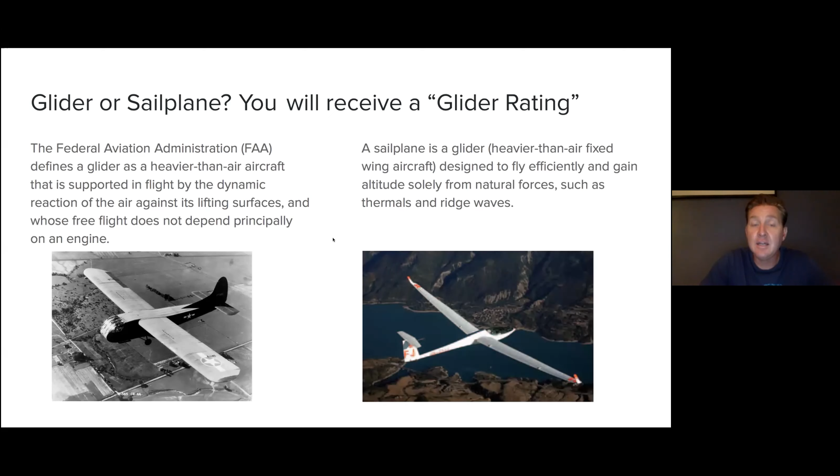Throughout this series, you're going to hear an interchangeable term, glider or sailplane. Those really are interchangeable - what you'll receive is a glider rating. But the FAA defines a glider as a heavier than air aircraft that's supported in flight by the dynamic reactions of air against its lifting surfaces, and whose flight does not depend principally on an engine. If you've been out to Boulder, you may have seen some self-launch sailplanes, and some have sustainer engines, but those are just used in place of a tow plane, and technically they're still gliders. The strict term sailplane is really an efficient aircraft designed to fly and gain altitude solely from natural forces such as thermals and ridge waves. So you'll hear those terms interchangeably.

As you go through looking at the schools, the FAA offers two different training paths. A Part 141 training school is typically reserved for professional pilot training. It provides more structured training with a standardized FAA approved training syllabus. All of the training done in Boulder, though, is done under Part 61, which gives a little more latitude to the components of that training. You're not required to complete a formal ground school - instead you could attend a course, do a home study course, or your CFI can sign you off for the ground portion.

And Armand, I actually looked for a 141 based glider school and couldn't find anyone in the country. Do you know of a 141 glider school? Negative, no. I don't think it exists. It's pretty specialized.

Some of the basic requirements - to be able to fly solo, you need to be 14 years of age and have the aeronautical knowledge on a test developed by your instructor. For a private rating, 16 years of age, complete the training and flight time requirements described under FAR Part 61. FAR Part 61 is a very important part for you to look up in your training to understand the requirements for your specific type of rating. And then you still have to pass the knowledge test and a practical test. If you're doing a commercial add-on or glider instructor glider rating, then 18 years of age, and again the knowledge test and another practical test in that case.

Jeff, are you showing a slide? Are you sharing a slideshow? Yeah, you're not seeing it? Correct, not seeing it. Are you seeing it now? No sir. Let's go back to... the green button on the bottom ought to give you the screen sharing. Yeah, okay, I see the problem here. Okay, I think there we go, working now, good. So you see glider design? Yes. Okay good, please proceed. Sorry about that, I had it beautiful on my screen, but it wasn't going to you guys.

Progressed on to a steel and fabric type of composition. These became popular - the Schweizer 1-26 in 1954 kind of really touched off the use of these materials in gliders, and then progressed on to metal wings with steel tubing and fabric fuselages, to where we had all-aluminum type of aircraft. Again, the 1-26 was one of those.

As composites became more available and easier to work with, they became the mainstay of glider construction, or at least as it advanced. Another thing that helped this was computer-aided design as this went on, and this really touched off the transition from what you might call a glider to a sailplane.

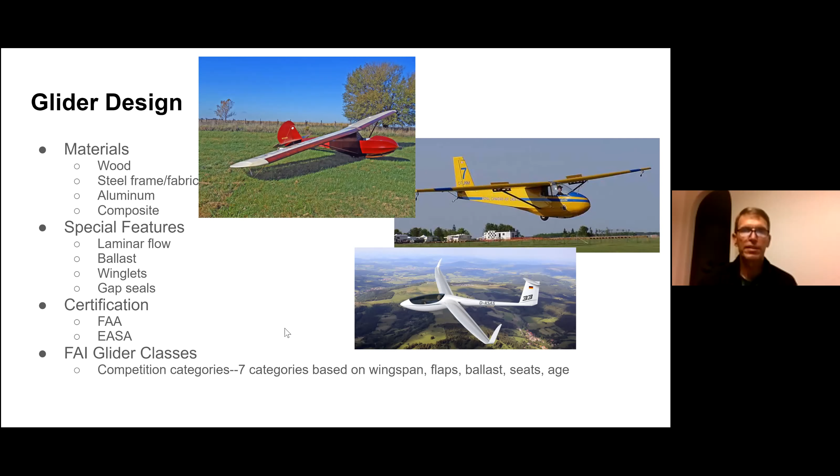Okay, moving on. Let's talk about the basic airframe components of a glider. We have the fuselage, which is the main area where the cockpit is and the wheels are mounted. Then we have the wings, which are attached to that. And we have the empennage, also known as the tail.

On the wings we have ailerons, used for roll control. We have air brakes, which are not unique to gliders, but pretty much every glider is going to have them - they control our glide path, a very important part of the aircraft. We have the horizontal tail, with the elevator attached, which controls our pitch. And we have the vertical tail or stabilizer, and a rudder, which controls our yaw or lateral control.

All gliders are going to have at least 2 wheels - your main wheel and your tail wheel. They may also have tip wheels or skids. Some gliders, particularly training gliders, are going to have a nose wheel in this area.

Another feature unique to gliders is the tow hook capability. You can either have a nose release, right on the nose or just aft of that, or a CG, center of gravity, release. Those are very important because they deal with how you're getting towed up into the air, and which one you'll be hooking into.

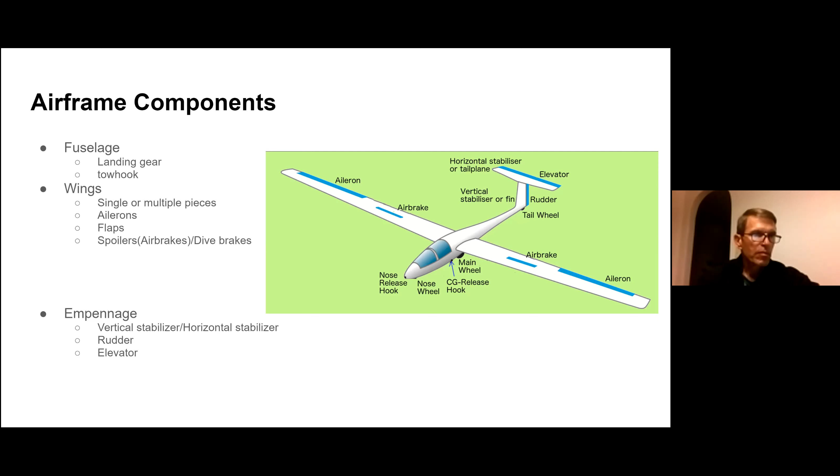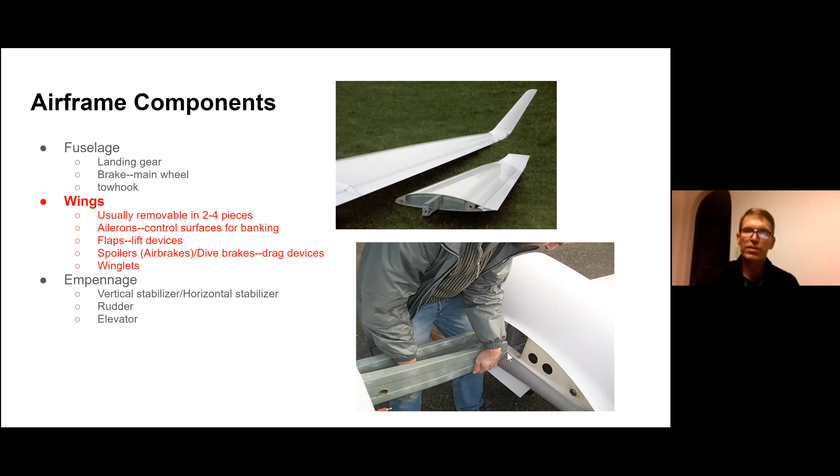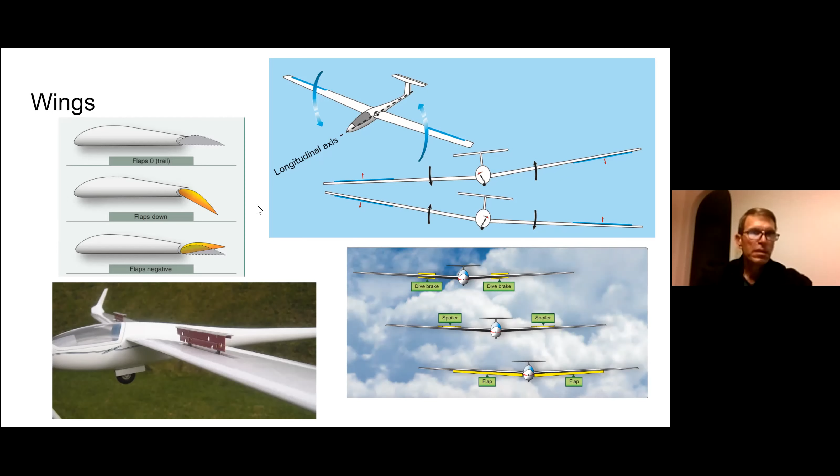For our empennage or tail, as I mentioned, we've got a vertical and horizontal stabilizer. Those are fixed surfaces. The rudder controls your yaw, or left and right movement of the nose. Your elevator on the tail controls your up and down movement, and that's called pitch.

For empennage variations, you've probably seen on powered aircraft various configurations of the tail. You can actually have one where there's no horizontal tail, and I'll show you a picture of that shortly.

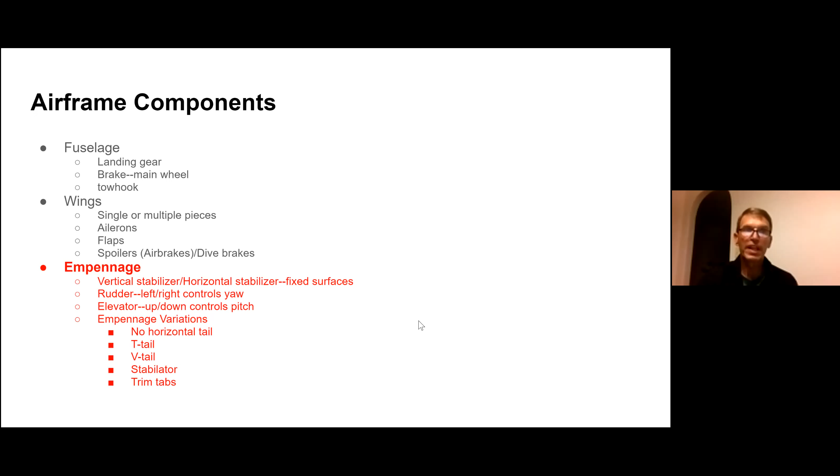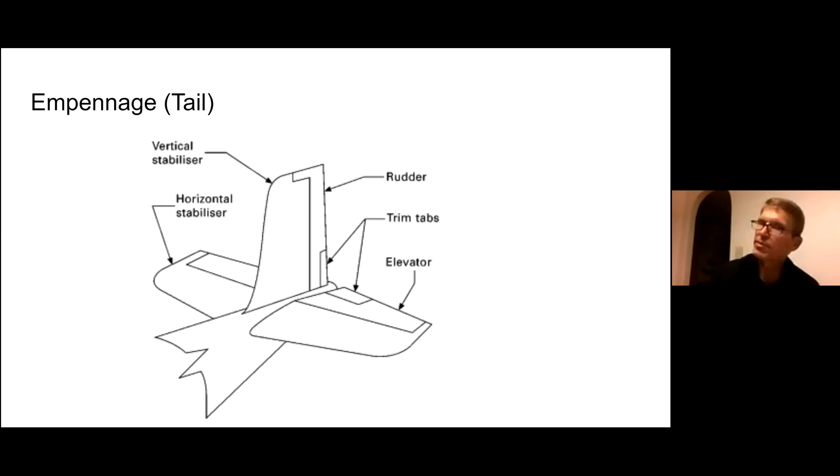I have yet to see trim tabs on a glider. I think the forces are typically not so high. Maybe Armand, you have experience with trim tabs on gliders? No, trim tabs seem to be unique to airplanes. On gliders I haven't seen it, usually we just have some kind of friction device that holds it in place, right on the stick itself.

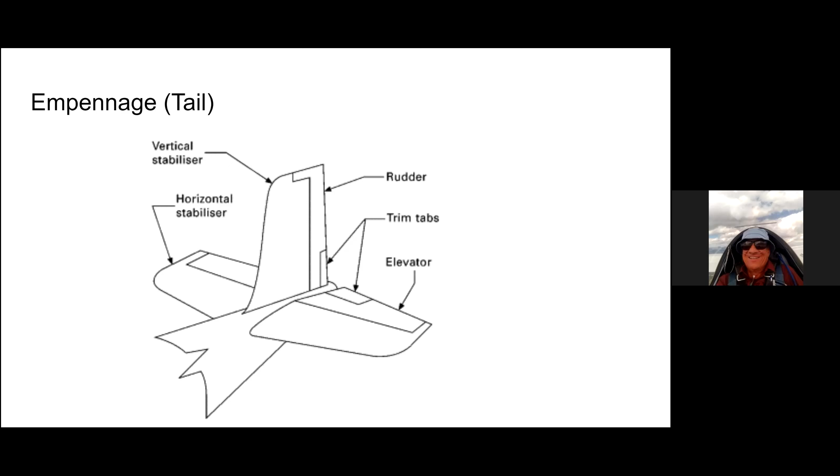Okay, so here's the empennage variations. As you can see in this example, it's basically just got a vertical tail, and the wing is actually providing the pitch control. I got to see, as did Armand, one of these flying at a contest we were at in Utah, and it seemed to perform quite well. Did quite well. A V-tail pictured here.

So what's kind of unique about that is they would be called ruddervators, is that the name for those? They control both the yaw and the pitch of the aircraft through a mixture control. A T-tail is simply where, like I said, the horizontal tail is on top. And then a stabilator, the entire surface is going to move for your pitch control.

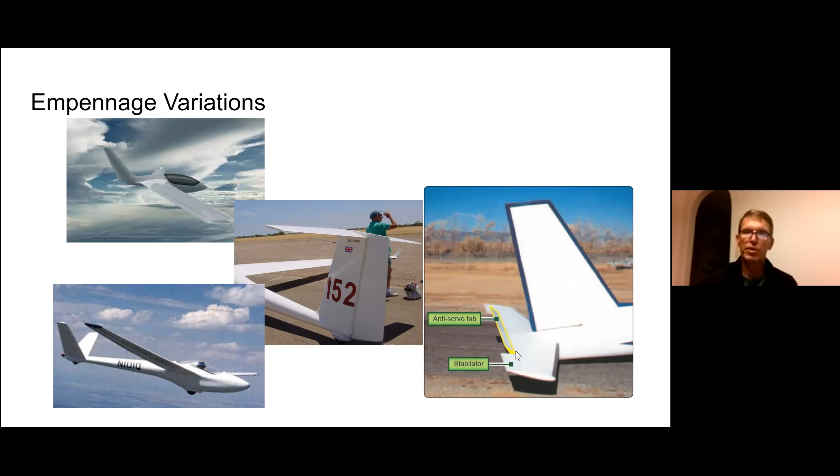Okay, power plant systems. We have two basic kinds of power plant systems: the self-launch, and the sustainer.

Your self-launch, again, there's two basic varieties. There's the touring, pictured here, made more for acting like a normal powered aircraft. Usually the performance of it's not going to be quite as good as other gliders, but there are some examples where there's very good performance. In fact, the one shown here, a Stemme, I think holds the world distance record in gliders. So it does not necessarily confer a performance disadvantage.

But in aviation, you have three things, and you can have any two of those. You can spend a lot of money, you can have high performance, or you can have low cost, but you can't have high performance and low cost at the same time.

Sustainer engine, you either have a front engine sustainer, pictured here, which is basically propeller blades that fold back against the fuselage, used if you are in a low lift situation but not trying to climb much, and it'll just help you get to an area where you might find a little more lift. And then we have the pop-up aft.

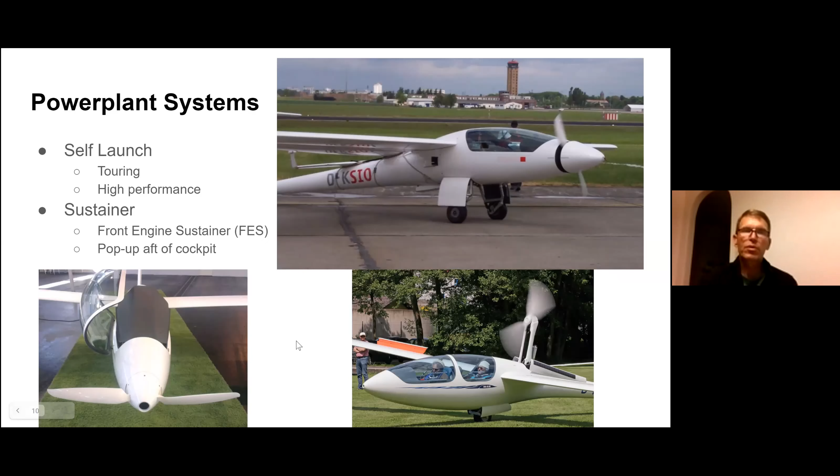Okay, any questions on components and systems of gliders?

I think that was all pretty good. Oh, somebody have a question? Jeff, I think that was great. I'd say just keep moving. Okay.

So our flight instrument categories: pitot-static, which include the altimeter, airspeed indicator, variometer; electrical/electronic, which include flight computer, FLARM, also variometer and other displays in the aircraft; magnetic, which is our compass; gyroscopic, which you rarely will see in gliders, more predominantly in the touring type of glider, and gyroscopic includes heading indicator, turn and slip, attitude indicator. And then what they call self-contained, which are the yaw string, outside air temperature, and G meter.

Displays often combine the pitot-static and the electrical electronic systems in modern types of flight instruments.

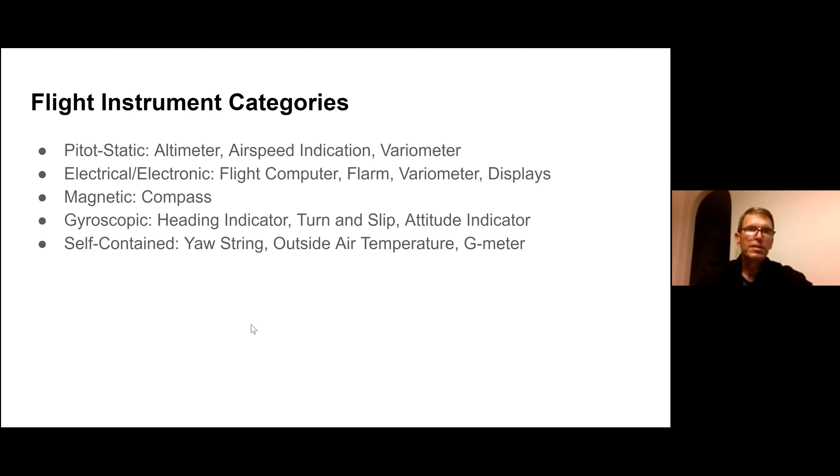So on a pitot-static system, pitot refers to impact pressure, and it's a forward-facing tube in the nose or the vertical tail. Static pressure refers to ambient or atmospheric pressure, and those are side-facing holes in an undisturbed air part of the aircraft.

You can see here the pitot tube is either going to be on the nose typically or in the vertical tail, and we have examples of both of those at Boulder. The static port will be in an area of the fuselage where there's not going to be any kind of impact air or Venturi type of effect, so it's basically as though it's in still air. You can do the same thing on the side.

So really it's all about physics. Changes in pressure cause changes in forces, which are measured and calibrated to show airspeed and altitude.

The airspeed indicator uses both pitot and static pressure. The pitot air pressure moves a diaphragm after a series of tubes in the instrument, which has static pressure on the other side. So you have the tube coming from the static port and a tube coming from the pitot tube, and between them you have a diaphragm. Based on physics, the greater the difference in pressure, the more the diaphragm moves, which corresponds to a higher speed.

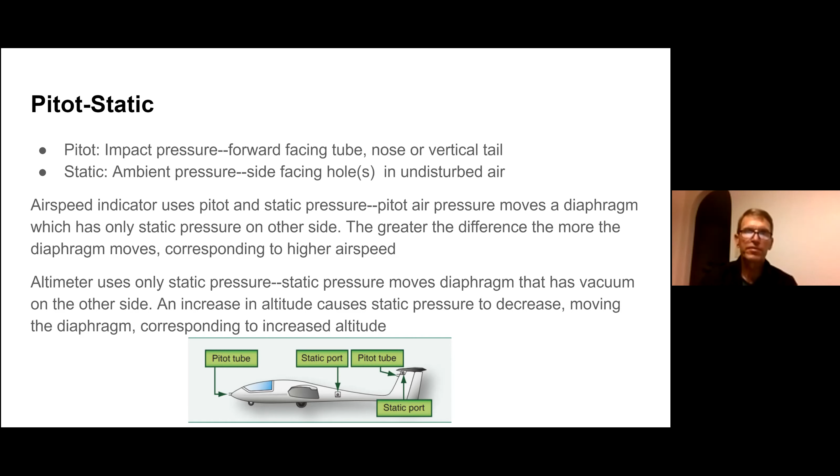Just as a side note, at 18,000 feet we have roughly half the air pressure that we have at sea level. The altimeter used in the glider is a sensitive altimeter, which has really tight calibration, enabling you to see differences of 10 feet or less in altitude.

Just a picture of how that operates. So if this is just kind of a schematic, if we have impact pressure here coming in at 1,013 millibars, and on the other side the static pressure is 1,013 millibars, it's going to show an airspeed of zero because we're not getting any change in differences of pressure.

If we're moving along at 60 knots and the air pressure is 1019, that's an increase in pressure that's going to move that diaphragm and move that needle over. On the altimeter side, we have aneroid wafers — as the static pressure decreases, these wafers expand, which goes through a mechanism and changes the indication on the dial.

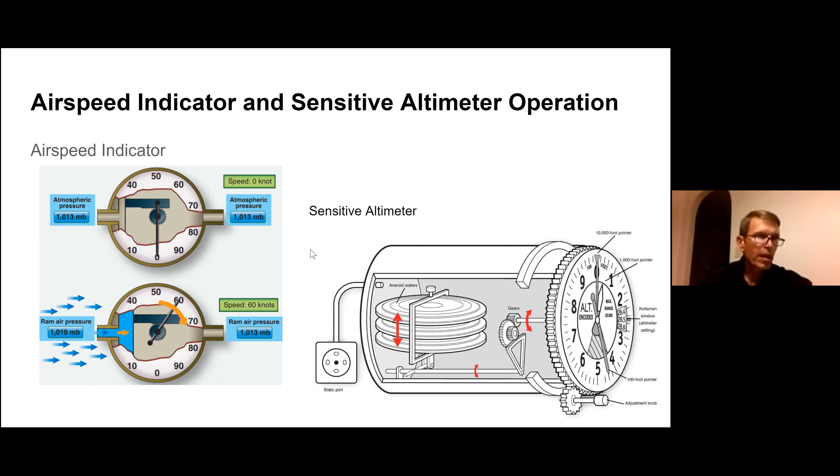All right, a little question and answer here. Anybody who's not a current pilot, any idea of the different types of airspeed that we might measure? Or different types of airspeed that would be of concern, I guess is another way to put it.

I guess I'll start off with IAS, indicated airspeed. Right, and then someone wants to chip in — true airspeed, I guess. Uh-huh. And your ground speed, of course, relative to the ground, and then your calibrated airspeed. Right. So when we're flying a glider, as you said, indicated airspeed is what the instrument's going to display. It's basically uncorrected for any atmospheric changes. So if you have differences in humidity and temperature and such, it's not going to account for that.

Installation errors aren't really errors in installation, but the fact that you're not going to have perfectly undisturbed air, especially at different flight regimes. You'll have different pressures that change the indication from being a true indication. Then instrument errors: in the design of any instrument there are going to be some irregularities or calibration problems.

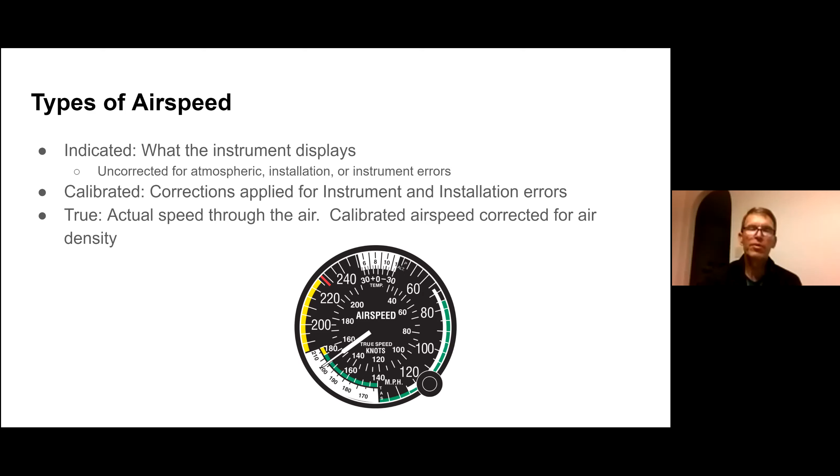Are you asking your audience or me? I'm asking you to talk about it. So, I guess what I'm driving at is, your stall speed, your best glide, your min sink - all those speeds are based on indicated airspeed. Right, and we'll cover that in a moment. Oh okay, I'll let you. Okay, go ahead, sorry.

Jumping too soon - so as part of that, we have airspeed markings on the airspeed indicator, and we'll talk about those. We'll start with the white arc here. This is your flaps speeds. The minimum there is your stall speed, indicated airspeed, stall speed with your flaps out. The top end of the white arc is your maximum indicated speed for having your flaps out. So it's a stall speed and a maximum speed for flaps.

Your green arc, the lower limit, is your stall speed with your flaps up - so with no flaps out. And your upper limit there is what we call normal operating speed, so you could basically be operating in any kind of air at that speed. There will be a caveat, and I'll talk about that in a moment. Then your yellow arc is your caution range, a range where you want to avoid unless you're in smooth air. So if you're gliding through smooth air, you're okay to be in that.

And then, as we just talked about, your red line is your velocity never to exceed. At low altitudes, and I feel safe to say any glider below about 12, 13,000 feet, that's going to be your actual velocity never exceed. It gets tricky when you get higher in altitude, which we commonly do over the mountains. So these are all indicated speeds we're talking about - flaps out maximum, minimum, flaps up stall speed, all the way up through your normal operating speed, your caution range, and your velocity never to exceed.

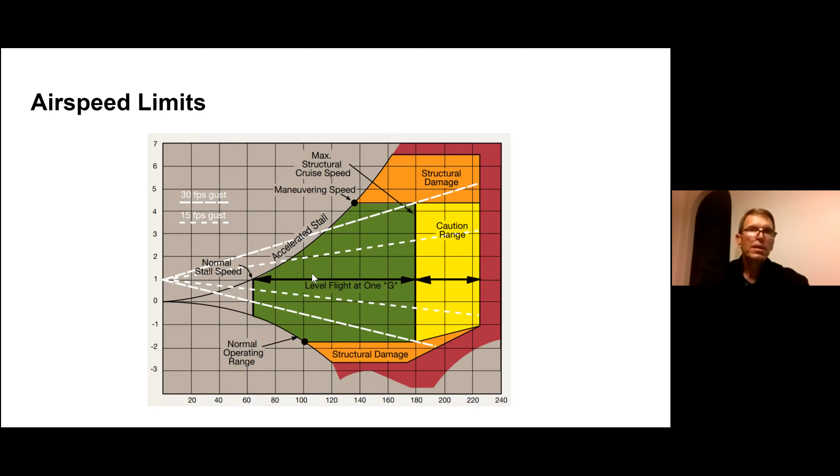So we were talking earlier about why the types of airspeed that we're talking about matter. Indicated airspeed is mostly what you're going to use to fly, and that mostly comes into play when we were talking about V-NE. For most of the flight you're going to do, 99% to 100% of the time, if you're not flying at high altitude, that's what you're going to fly off of. Your stall speed is always going to be based on indicated speed, no matter your altitude or conditions.

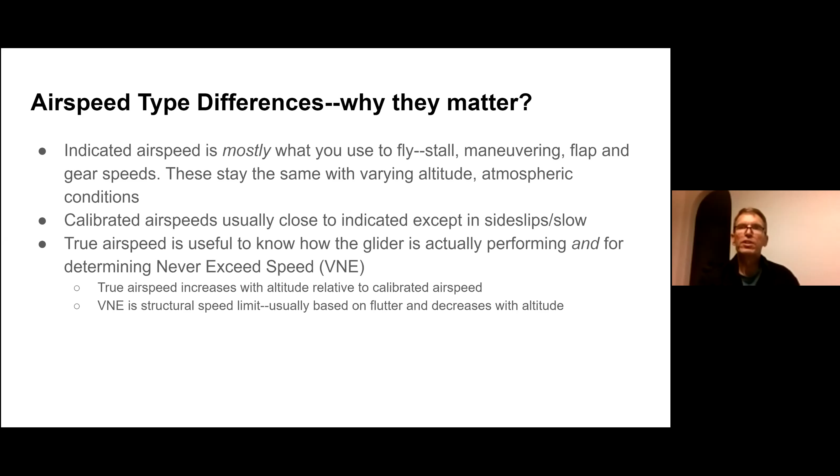Your maneuvering speed, your flap extension speeds, your gear speeds are all based on indicated airspeed. That's important because we don't have to do any calculations to figure out what speed we need to see on our airspeed indicator. These stay the same no matter the altitude or atmospheric conditions.

Your calibrated airspeeds are usually going to be close to your indicated airspeeds, except in sideslips or slow. Most of the time in your glider flight manual, airspeeds are going to be referenced as indicated, but it's possible they reference calibrated airspeed. In any case, for the various airspeeds, there should be a table showing the correction factor to get your calibrated airspeed versus your indicated airspeed at those other flight regimes.

True airspeed is useful to know how the glider is actually performing, because that's what you're going to be doing across the ground. If you're at 18,000 feet, you're going to be flying a lot faster across the ground than what your indicated airspeed says - well, wind-dependent, of course.

It's also important, as we talked about earlier, to determine your never exceed speed. So understand it's actually true airspeed that's going to be, at higher altitudes, dictating what your V-NE speed is. That said, you're still going to be looking at indicated airspeed - you just have to know that it's going to be lower at higher altitudes and know what your glider flight manual has for that. As we talked about earlier, true airspeed increases with altitude relative to calibrated airspeed, and V-NE is a structural limit, usually based on flutter, and it is going to decrease as your altitude goes up.

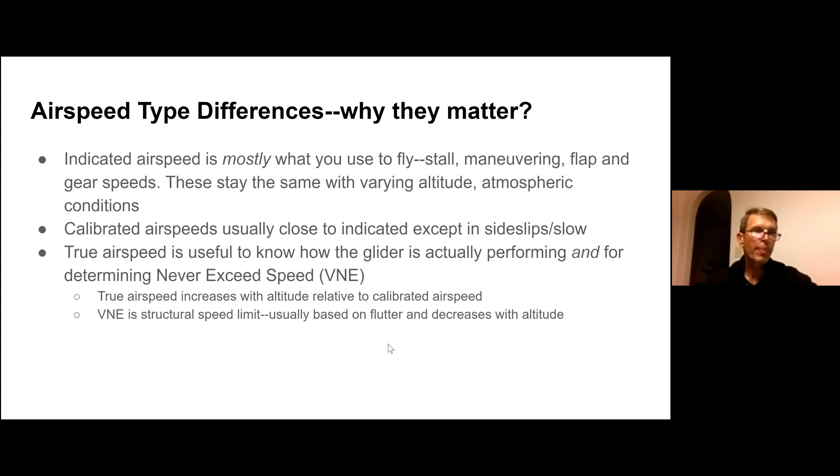Okay, types of altitude. As a glider pilot, there are going to be 5 different types of altitudes that we're concerned with.

Pressure altitude is an indication if you set standard sea level pressure, which is 29.92 inches of mercury, into your altimeter. This is really only used above 18,000 feet in the US, and that's what we call a transition altitude. But the other important thing about pressure altitude is you can get an idea of what the instability of the atmosphere is, and it's also necessary for calculating your density altitude, which gives you an idea of what your performance is going to be at higher altitudes.

Density altitude is pressure altitude that is corrected for non-standard temperature, and accounts for the temperature effects, and to a lesser degree humidity effects, on performance.

Much more important for a powered aircraft or for your tow plane - high density altitudes at Boulder will often in the summertime be over 8,000 feet of density altitude, and that affects the climb rate of the tow plane. So you might not be climbing out very well, and that's because the density altitude is high. So it's important for us anytime we're under tow or if we're in a self-launched sailplane.

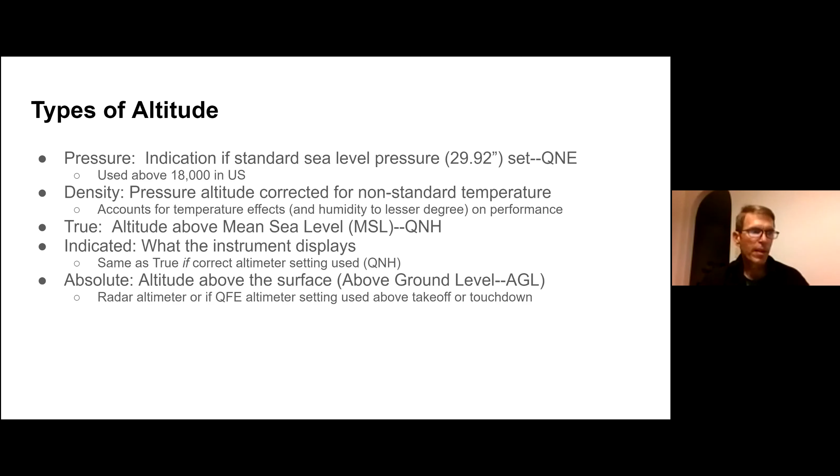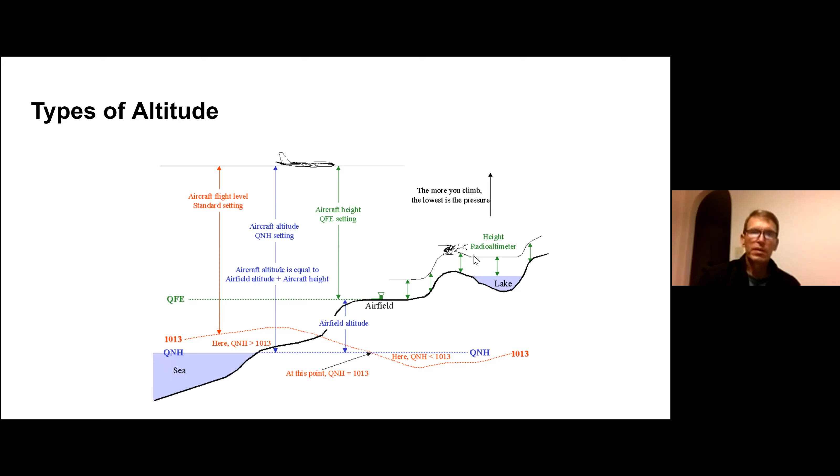Again, QNE is based on a 2992 datum. QNH is based on mean sea level. QFE is saying, hey, I want to show my level as 0 at the runway elevation.

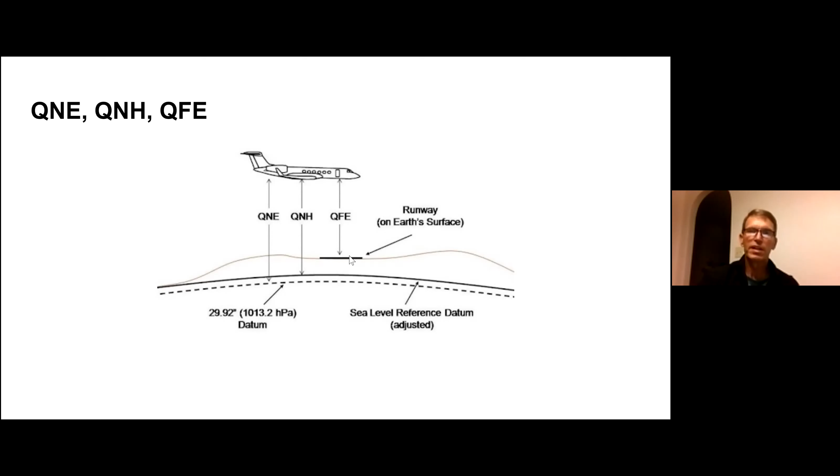So what can go wrong with the altimeter? When you're looking at your altimeter, what can be a problem? Well, the important thing to start with is the altimeter is really just a barometer—it's measuring differences in air pressure. And air pressure varies with altitude, but it also varies with temperature and the air masses, basically weather or moving to different parts of the atmosphere.

Air mass pressure differences are accounted for by setting the local correct altimeter setting into the altimeter. So if you don't have a correct local altimeter setting in, it's not going to read right, and your indicated altitude is not going to be what your true altitude is. Probably just as importantly, or sometimes more importantly, temperature differences are not accounted for at all in the altimeter.

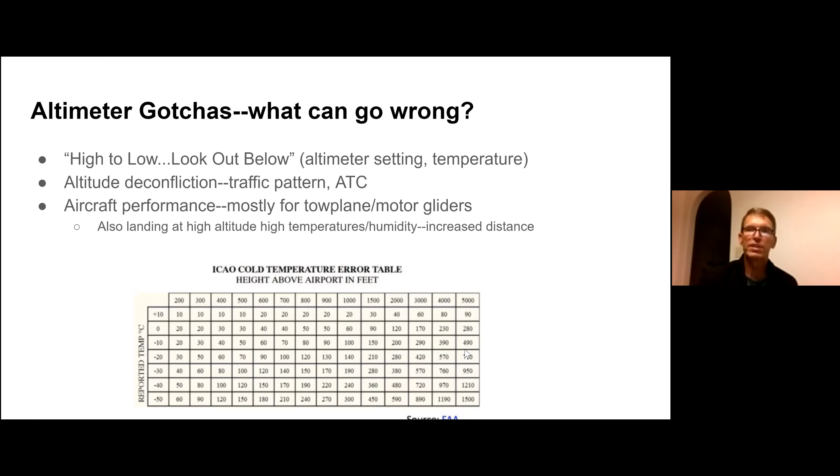This chart here is more about if you were flying in extremely cold temperatures, the effects that temperature will have as far as an error, showing height above the airport. For instance, if you thought you were 500 feet above the airport on an extremely cold day at negative 20 degrees, you're actually going to be 70 feet low. It's even more extreme at higher altitude—if you thought you were 5,000 feet above the airport at negative 20 degrees, you would actually be 710 feet lower than that.

An instrument that is unique to gliders is the variometer. A variometer measures ascent and descent of a glider and the air mass combined. So it basically is telling how fast you're going up, how fast you're going down, relative to the Earth.

It's very similar to a vertical speed indicator, but much more responsive and sensitive to changes in altitude. And it's displayed as speed as opposed to a vertical speed indicator, which is displayed in feet per minute. That speed is going to either be in knots or meters per second.

The principle of operation of variometers is very similar to an altimeter, except it's going to measure the rate of change of the static pressure as opposed to just the absolute value of the static pressure. So how quickly that static pressure you're moving through is changing versus just what that actual static pressure is.

There are two main types, mechanical and electric. Mechanical uses a flask, which is basically a little storage of ambient air. On the other side of that there's a diaphragm, with a small hole between the flask and the diaphragm, and the other side is connected to static pressure. So air flows into or out of that flask depending upon pressure differences inside the flask versus outside ambient air pressure, and a higher flow rate onto that diaphragm equates to higher rates of climb or descent.

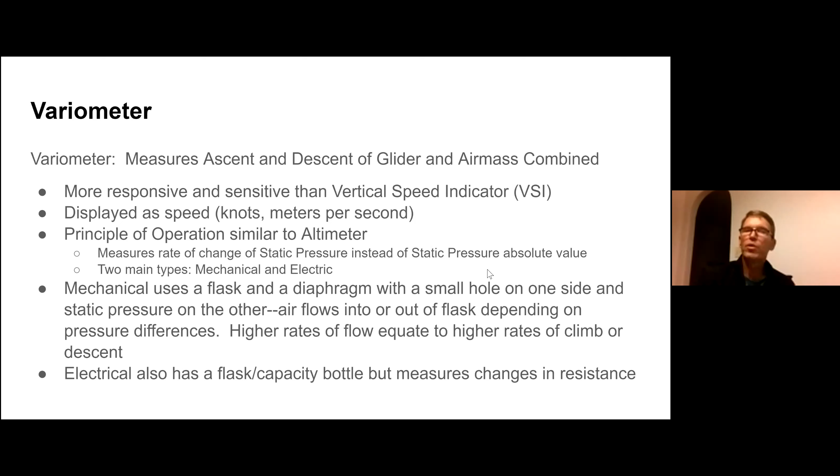Some enhancements to an audio system - but one other thing I wanted to say about the speeds in knots and meters per second: it can help, especially if you're a powered aircraft pilot, to know that 1 knot is equivalent to about 100 feet per minute, and 1 meter per second is equivalent to about 200 feet per minute.

So some enhancements to the basic variometer, which is just measuring how fast the glider is moving up and down relative to the ground, is audio, which uses tones or beeps at various rates and pitches to indicate climb or descent rate. You're only going to find this with electric variometers. The biggest thing about this is it's a huge safety enhancement, because you're able to look out of the cockpit as opposed to looking at a needle inside your cockpit.

So you can be focusing on traffic in the air and the ground. It's also, at least to me, easier to gauge and conceptualize changes in lift and sink. Here that tone change gives immediate feedback on whether you're in stronger lift or sink.

Another variometer enhancement is the MacCready ring. This is a device that displays the optimal speed to fly based on what your expected thermal strength is. So as we're flying from thermal to thermal, we might have an idea of how strong the thermals are that day, and we can set our MacCready ring based on that expected thermal strength, and it'll tell you how fast to fly based on whatever sink you happen to be in between thermals.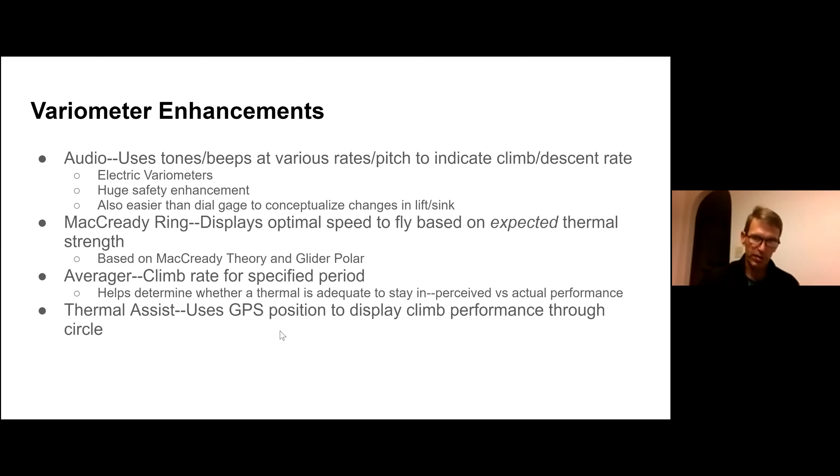Thermal assist is a neat electronic aid that uses GPS position and shows where you're actually encountering the highest rate of climb in a thermal. It helps you center on a thermal, which is basically getting to where the strongest core of the thermal is.

A basic uncompensated variometer has an inherent flaw in that it doesn't take into account that if I'm flying fast and I pull back on the stick and pop up in altitude, that climb isn't due to thermal, ridge lift, or any kind of lift in the air. We call that a stick thermal. Pulling back on the stick causes the glider to climb, but at a cost of less speed. So are you really gaining anything? Probably not. You're just artificially gaining altitude, and your variometer is going to tell you that you're going up if you have an uncompensated one.

What you really want to know is, am I going up because I'm in rising air? The total energy variometer compensates for this, and there's two types. There's a Venturi tube type, which uses a tube on the aircraft with holes on the back, using a Venturi effect to offset some of that artificial thermal from pulling back on the stick. And then there's another type that uses a pitot tube inlet to the variometer that does the same thing, offsetting the pressure change due to the actual airspeed change.

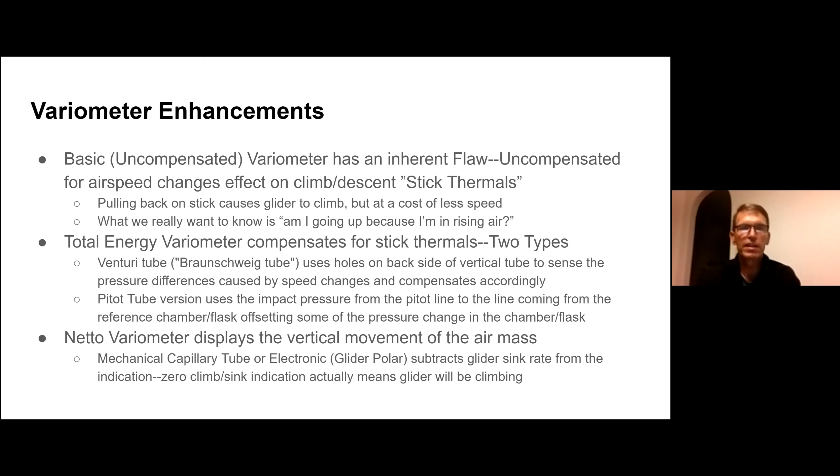Finally, we have the netto variometer, which tells you not how fast you're climbing or descending over the Earth, but how fast the air you're in is ascending or descending. It basically uses a mechanical or electronic system combined with your glider polar to subtract the sink rate of your glider from what your variometer is indicating. So it's just telling you how fast the air is moving up and down. Not as useful for most types of flying, because what we want to know is how the glider is actually doing over the ground, not how the air is doing. It's more useful to see whether you did a good job of staying in rising air after the fact, not while you're actually flying along.

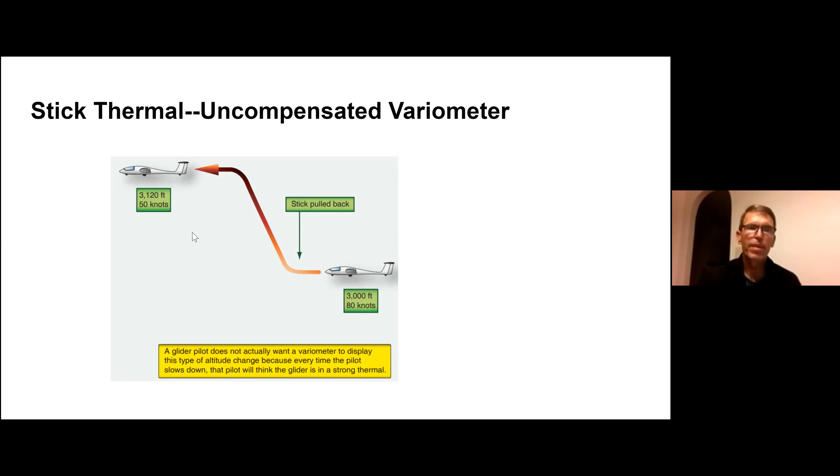Here's just a diagram of what's happening: if you're flying about 3,000 feet at 80 knots and you pull back, now you're at 3,120 feet at 50 knots. The uncompensated variometer is going to say that you were in lift, but the reality is you just traded that airspeed for altitude and you weren't in lift. These are just some diagrams of how they work.

Your variometers, from simple to complex: basic mechanical is your MacCready ring. This ring rotates around and has a speed indication that this needle points to, telling you to fly this fast based on your expected thermal strength. Then we have the complex electronic variometer, which has a variety of different indications you can show, from your average rate of climb to your netto and your MacCready settings and so forth.

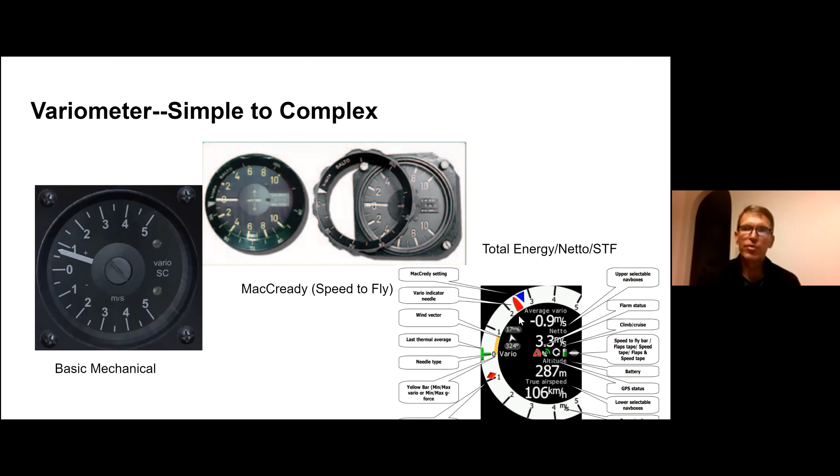Okay, on to a flight computer. A flight computer basically uses variometer, GPS, and pilot inputs to aid in soaring and safety decisions through navigation and performance. There's lots of ways that you can have a flight computer on board. It can be something mounted on the panel.

It could be a larger moving map type of display, or just a circular device on your panel. It could be an app that you put onto an Android device. So basically, it could be from basic to very complex on all types of setups.

Typical features you're going to find in a flight computer include a database. You can have land out locations, common turn points, airport information, airspace information, moving maps. You can have a predictive weather overlay, so you can see where it's predicted to have the best lift or where to stay away from bad weather. It's going to give you distance, estimated time of arrival, and expected altitude to points.

And it's going to give you your glide range based on current conditions and whatever you've put in on that MacCready setting. So it gives you a whole lot of different information. Very useful for competition, and or if you're doing some kind of task where you're trying to fly, say, a long triangle or an out and back. Again, as a navigation aid, your speed to fly through all these different air currents is going to be updated for you, as opposed to you having to manually compute them or change a ring on your variometer.

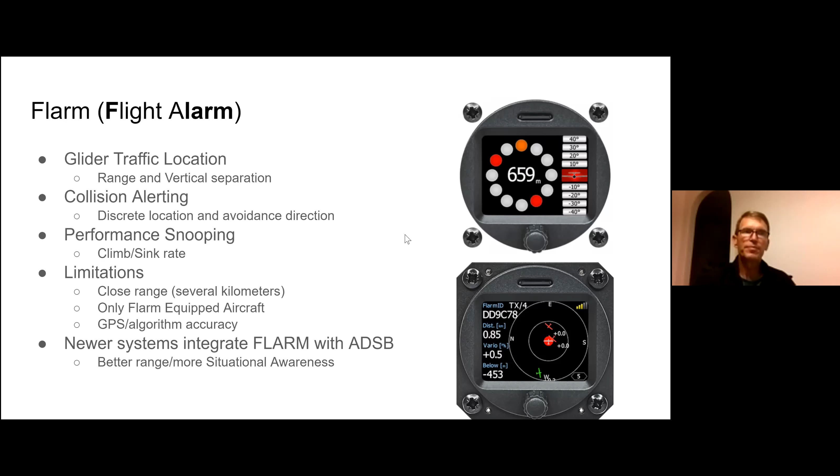Magnetic compass, gyroscopic instruments, G-meter, outside air temperature. Most of us probably know how a compass works, but it uses Earth's magnetism to determine direction. There are some errors associated with it that you probably want to be aware of, especially for your check ride, and you can read up on those. The compass is useful in a big picture sense to help you roughly determine your direction, but it's not an instrument you're going to be using minute by minute while flying.

Gyroscopic instruments are really not used in gliders. If we're cloud flying, you'd want to have it. And again, motor touring gliders, which are set up more like powered aircraft, are going to have that.

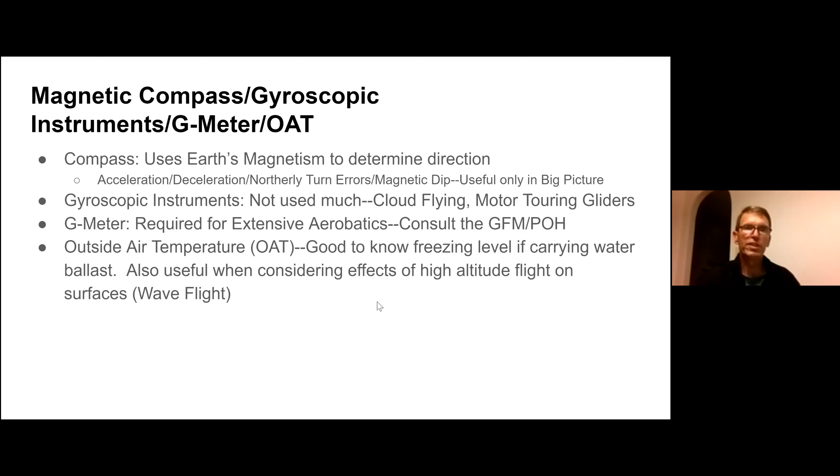G-meter: some gliders are going to have that, especially if you plan on doing extensive aerobatics. You want to consult your glider flight manual, pilot operating handbook, for whether it's required for certain aerobatics you might want to do. Outside air temperature: your computer is going to use that information, but it's also good to know freezing level if you're carrying water ballast, and also useful if you're flying at high altitudes, typically in wave flight, because you generally don't want to take fiberglass type aircraft into situations where you have a super low air temperature.

And finally, the yaw string. It's the original instrument, if you will, for flying an aircraft well, and it's also the cheapest. Basically, your yaw string is going to help you maintain coordinated flight, which is how you're going to extract the most performance from the glider.

If you're in slipping flight, so your nose is pointed outside the turn, the yaw string is going to point to the outside. If you're in skidding flight where your nose is to the inside, it's going to point to the inside of the turn, and in coordinated flight, it's going to point straight back.

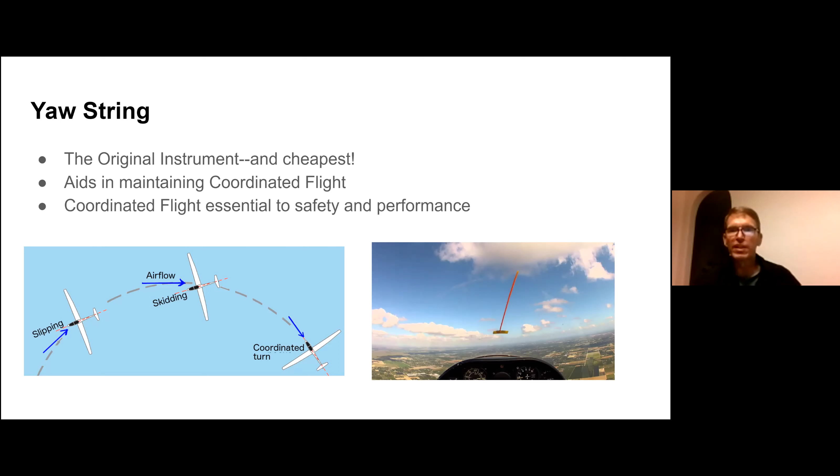Jeff, that was great. That was a great rundown of instrumentation and glider. Thank you very much. Only one comment I have is when you talked about the advantages of having the audio in a Vario.

One thing I'd like to add, and this is more of a flight instruction than a ground instruction, is that when you're able to keep your eyes outside of the cockpit, it means you can look at the horizon and just listen to that thing going beep, beep, beep, and hopefully it's going to beep faster and faster. It's really getting excited, that means you're in good lift, and you're able to look at the horizon and make a much better turn than if you're staring at or chasing needles on airspeed or the variometer.

So it lets you keep your eyes outside of the cockpit, and that's important for better maneuvering of the aircraft. Right, and safety. Yeah, both. Being able to look for other aircraft. Yep.

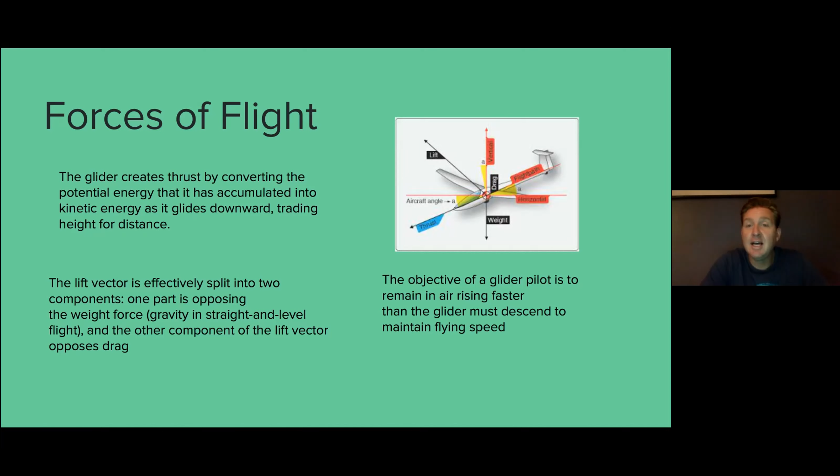The lift vector is effectively split into two components. One of those parts is opposing the weight force, or gravity, and the other component of the lift vector opposes drag. So it's a very familiar piece here, but it's important to be able to describe how thrust is produced and how lift is produced in an aircraft that doesn't make its own thrust.

One of the big pieces we're always fighting is drag. When we talk about drag, we really talk about total drag. There are 2 types of drag that make up total drag: parasite drag and induced drag. Parasitic drag we can think of as like a leech.

It's just grabbing onto the aircraft and slowing us down, and it takes the form of 3 different types of drag. Form drag results from the turbulent wake caused by separation of airflow from the surface of a structure. We've all felt form drag if you stick your hand out of a moving car sideways at highway speeds, and you can feel that incredible dynamic pressure on the front, and then the burble on the backside of your hand.

If you turn your hand sideways, it goes a little bit faster, but then you have skin friction drag. Those are the frictional forces that create a boundary layer equal and opposite the skin friction force on the glider. And interference drag happens anytime we have 2 structures of varied air currents that meet. That's particularly relevant anytime you have wings meeting a fuselage, or a vertical stabilizer meeting a horizontal stabilizer. Those local air effects have to combine and crash into each other, creating interference drag.

Another type of drag that makes up total drag is induced drag. We think of induced drag as the drag created when we create lift. As we get high pressure on the lower side of the wing and low pressure on the upper side, we end up creating a vortex that fills in the lower pressure on the top side. That lift is lost, but the energy to produce it has already been expended.

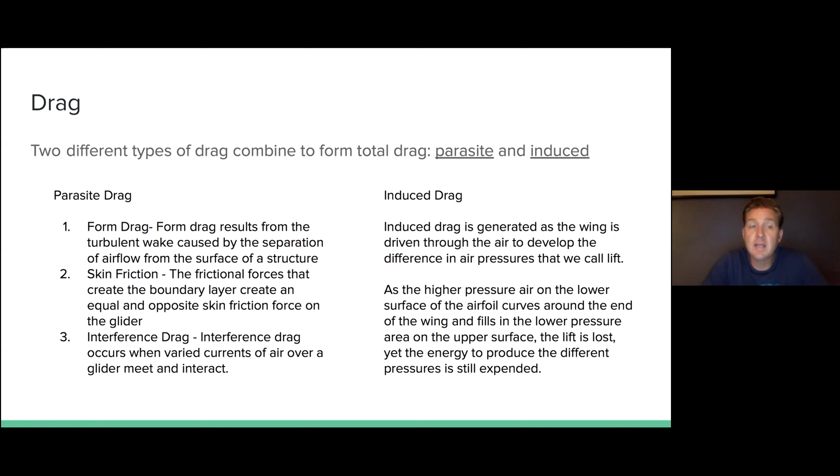So the 2 types of drag are parasitic and induced, and each is formed differently. Parasite drag is very low at low airspeeds and increases rapidly with an increase of airspeed, as we see on the left-hand side. Induced drag is high when we're at high angles of attack, and as we reduce angle of attack and gain speed, that reduces over that speed range, creating what we think of as a very familiar drag profile.

If we took the sum of those two types of drag, we see our minimum drag, or our L/D max, at the bottom - that's our total drag, and that's how we determine our L/D max. Looking at the right side, we see something very familiar too, and this is what we call a glide polar.

We'll look at that more in the performance section, but basically, if you took that total drag and flipped it upside down, you'd end up with something that looks very similar to a polar, which we use a lot in gliding. We'll go through the details of how to use a polar in the next section, but I think that's a really cool demonstration of how minimum drag also relates to our best glide speeds.

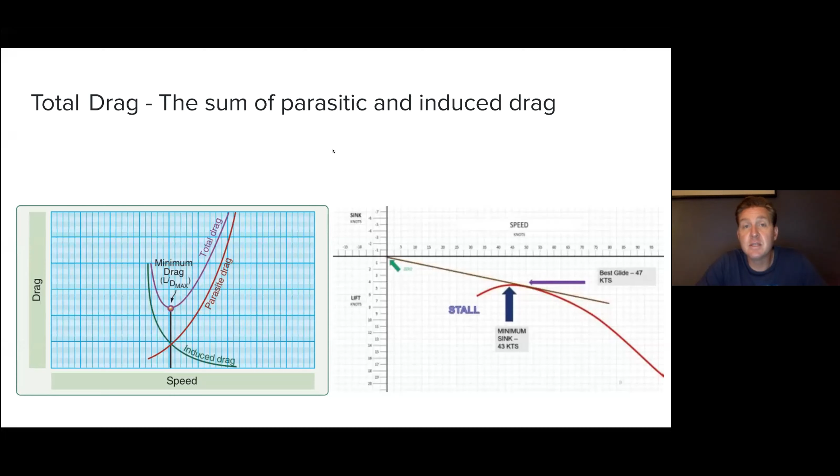One of the big factors that affects drag and controllability is the shape of our wing. We call this wing planform - think of it as the silhouette you look at from the top of the wing. There are 4 regular wing planforms: elliptical, rectangular, tapered, and maybe even swept forward.

An elliptical wing is a beautiful wing, fully rounded. It's relatively difficult to make because of all the compound curves and changing structures. It's a very efficient wing because as the wing tapers out gracefully to the tip, the lift profile decreases - it's almost like making a natural winglet out there. Really helps with the induced drag.

One of the problems, though, is because the lift is so equal across an elliptical wing, the stall characteristics can be very sudden and very prompt. So something to keep an eye out for if you fly an aircraft with an elliptical wing.

A very simple wing to build is a rectangular wing. That's a very easy wing to build - looks like a big Hershey bar. You see that on a lot of Pipers and things like that.

It actually has relatively high induced drag because we end up with a very big wingtip vortice on the tip there, but very gentle stall characteristics. Typically we can design those wings so that they stall at the root and the stall progresses outward, so we maintain aileron effectivity. Most sailplanes you'll see and fly actually have a tapered wing, which is much closer to an elliptical wing, but takes advantage of some ease of construction techniques of a rectangular wing while giving some of the benefits of an elliptical wing.

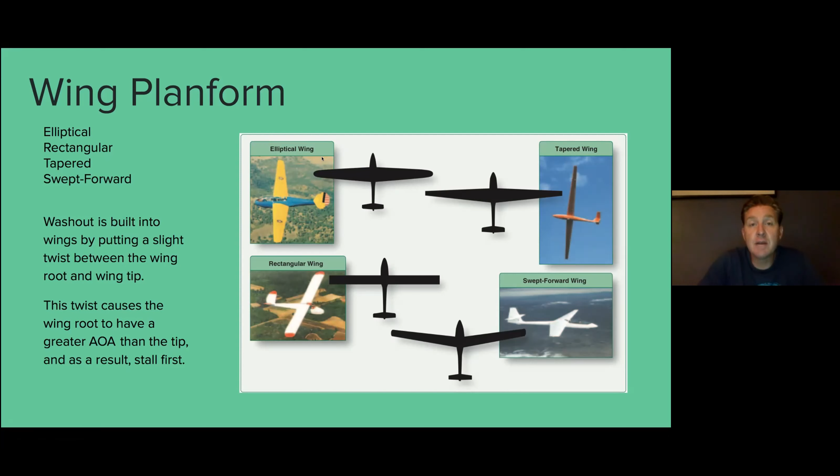When we look back to that glide polar, we really want to think about glide ratio. And that's a really exciting thing to think about as you move from training aircraft into higher performance aircraft. You start salivating about these incredible glide ratios that they get. Glide ratio is very simply just the airspeed that we get divided by the sink rate in relation to 1.

So it's the number of feet that a glider travels horizontally for every foot of altitude loss, and we can see that on the glide polar. To give you a reference, the club ASK 21 typically gets about a 20 to 25 to 1 glide ratio, where a lot of the high performance ships that the private gliders are flying out on the west side of the field are 50 or 60 to 1. So an incredible performance increase through flatter polars and much higher performance aircraft.

So a glide polar is a graph provided by the aircraft manufacturers that's available in the flight manual, and it details the glider's sink rate in still air at airspeed ranges that are within the normal speed envelope.

On the left-hand graphic there, you're going to see minimum flying speed. That's essentially where the aircraft will stall. You'll see that the sink rate is relatively high at the stall because we're essentially on the backside of the polar, or in aircraft terms, what you would consider the backside of the power curve. The aircraft is still flying, it's not technically stalled, but the drag is very, very high, and so the sink rate gets very high.

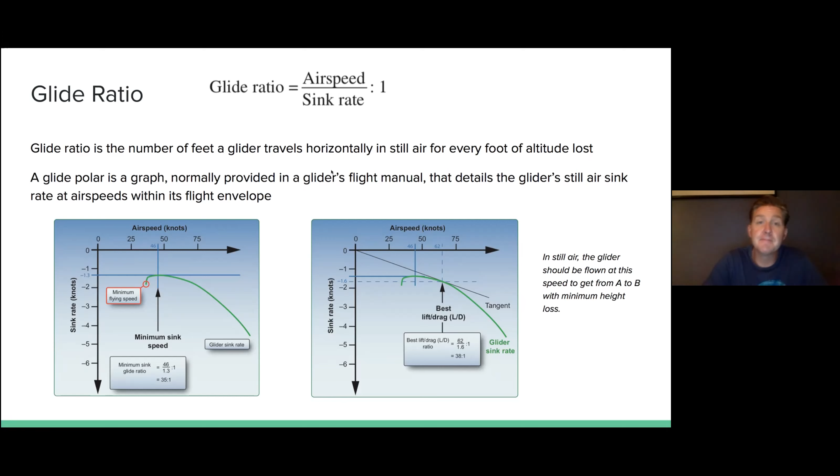One of the factors that affects aircraft performance is the aspect ratio. The aspect ratio is basically how long and how skinny our wing is. Aspect ratio is determined by dividing the wingspan from wingtip to wingtip by the average chord. Again, the chord is the distance from the leading edge to the trailing edge of the wing.

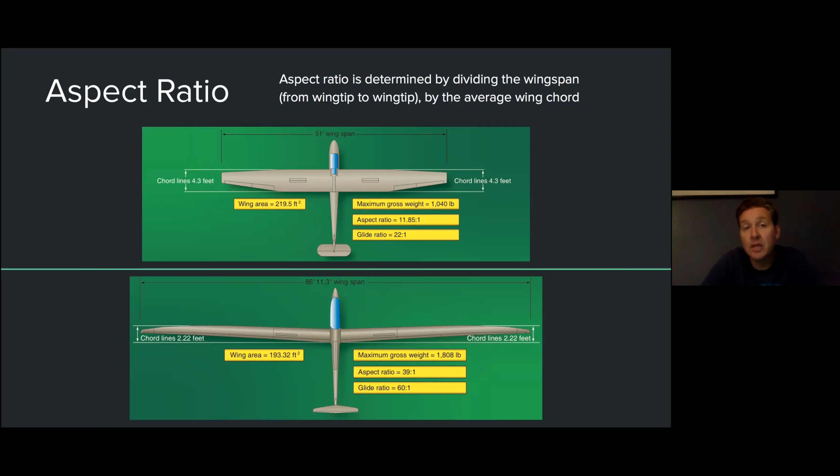Aspect ratio plays a significant role in the reduction of induced drag, especially over the span, so typically we get much better glide ratios by increasing aspect ratio. However, there are some downsides to having really high aspect ratio. As you can imagine, these really long wings have a lot of distance between those tips — that lower one, 86 feet, is a huge wingspan. But adverse yaw with ailerons can become a major factor there, and they can be tricky to fly because they require a lot of rudder coordination to fly appropriately.

Anytime we're talking about aerodynamics, we want to consider stability. There are really two types of stability that you might be asked about on your oral exam. The first of those is static stability. Static stability is the initial tendency of an object to return to a state of equilibrium.

So if you were to take one of those old punching bags that we all probably had when we were kids, and you knock it over, it has a very low center of gravity, so it has high static stability — the initial tendency is for it to return to an upright position. Whereas if I took this pin and dropped it, it doesn't have positive static stability; it does not tend to return initially to a state of equilibrium.

Dynamic stability describes the oscillations or the return as a response to static stability. So if we were to have an aircraft with neutral dynamic stability and we displaced the flight controls and just let it go through oscillations, you might see that phugoid, or that rate of change, just continues.

Hopefully we have an aircraft with positive dynamic stability, and those changes get smaller over time due to interactions between the trim system and the horizontal stabilizer and the main wing, also related to CG and center of lift. Hopefully those dynamics will get smaller and smaller and smaller.

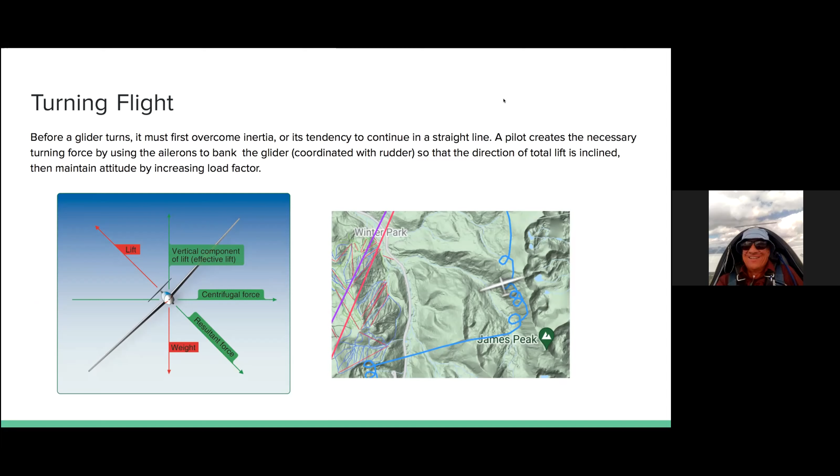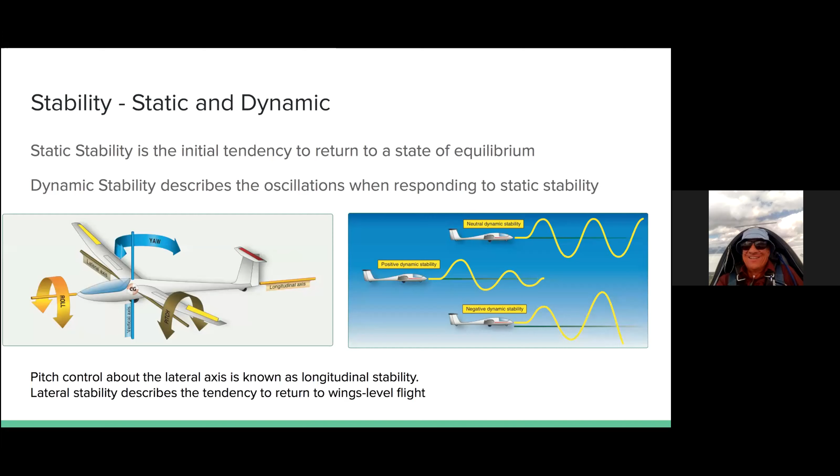So we want to be careful of that. Jumping back to the oral exams coming up for our students: flutter is based on true airspeed, and we want to make sure we're not letting our true airspeed get above the published maximums.

Sorry, Casey. Yeah, no, that's a great answer.

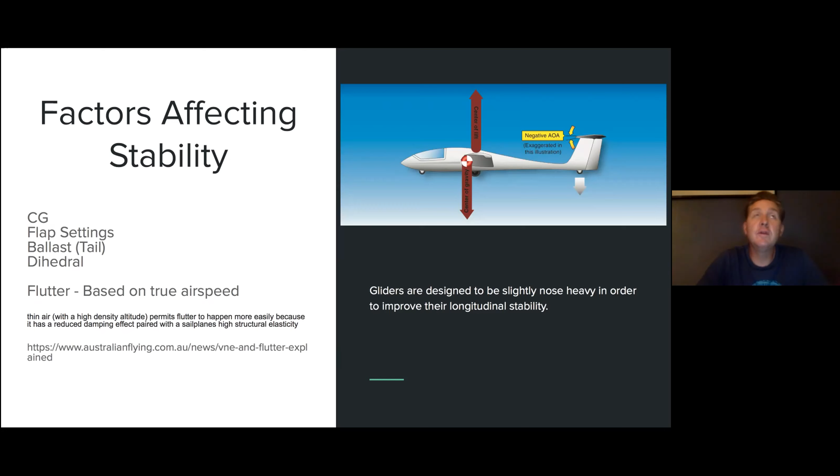Flutter—when we talk about flutter, let's talk about turning flight. The greatest thing about sailplanes is you're going to spend a lot of time turning. Just out of fun, I picked out one of my last flights.

I was down by Winter Park digging out a thermal over by James Peak. At this point you're really low—I was relatively low and really needed that thermal. So I was really paying attention to the mechanics of turning flight to make sure I was efficient and able to get out of there.

Keep in mind that if we're flying in a straight line, a glider must overcome its inertia, or its tendency to continue in a straight line. So the pilot creates the necessary force by first using the ailerons to bank the glider, then coordinates that with rudder so the direction of total lift is inclined. In that turn we have to increase our pitch attitude, or angle of attack, by increasing load factor to fly level. A lot of mechanics going on there, but it's important to understand we want a horizontal component of lift to effectively turn, and of course keep it coordinated throughout so we're not increasing parasitic drag by increasing the surface area of our fuselage exposed to the free airflow.

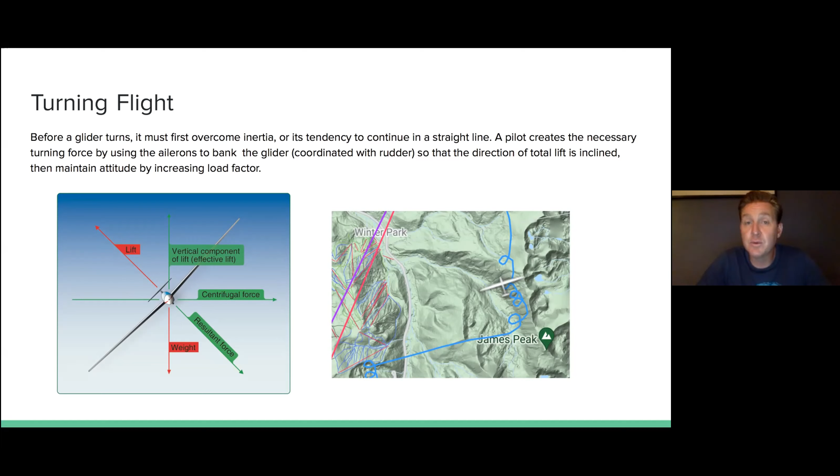Load factor is the ratio of total air load acting on the glider in relation to the gross weight of the glider—there are some great charts in the Glider Flying Handbook that illustrate this. In a turn at constant speed, the angle of attack has to be increased to furnish the extra lift necessary to overcome the centrifugal force and inertia opposing that turn that was keeping us straight. So as we increase the bank angle, the AOA must increase to provide the lift, and the result of increasing the AOA too much is we could reach our critical AOA. Remember, an aircraft can stall at any speed—it's all really related to the angle of attack and reaching that critical angle of attack.

Remember from our textbooks, and we can see in that top graphic, that when you're in a 60-degree bank level turn, you're going to be at a 2G turn. And that same 60-degree bank angle is going to increase our stall speed by 40%—a pretty drastic increase. Again, it's really based on AOA, but we see that in the cockpit as an airspeed indication, so that's something you could predict.

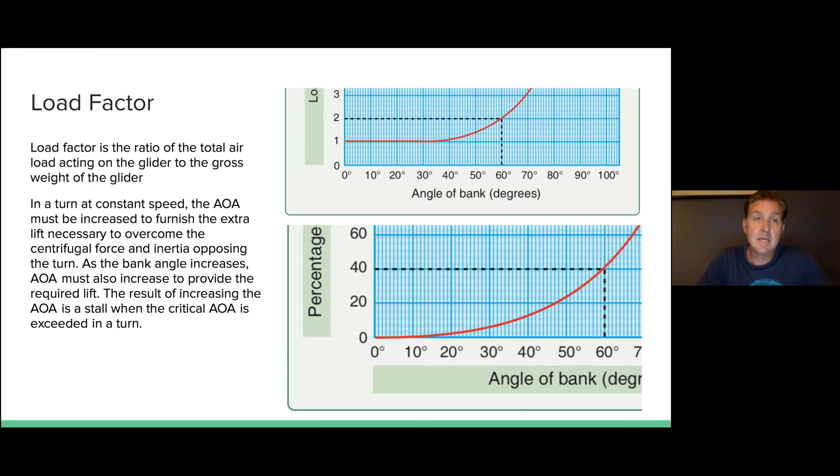One of the things to consider as well is the rate of turn and the radius of turn that we are affecting in a turn. So if the airspeed increases and the bank angle remains the same, then our rate of turn will decrease—so we can get a decreasing rate of turn that way.

However, the radius of a turn at a given bank angle varies directly with the square of the airspeed. So basically, if the airspeed is doubled, the radius of the turn will be 4 times greater. When we're trying to thermal, that's a really important point to keep in mind, because it can significantly kick us out of a thermal if we thermal at too high an airspeed.

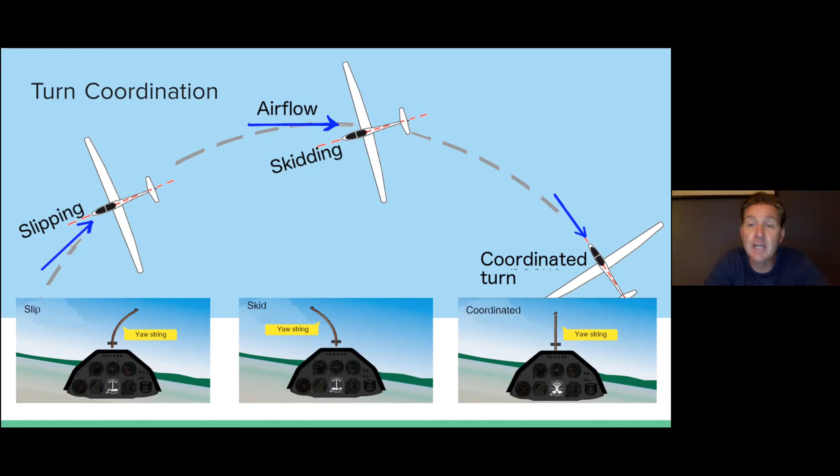Jeff used the same graphic, and I think it's a good one. We can see the difference between a slipping and a skidding aircraft. But in this case, we can also see what the yaw string would look like, and as Jeff said, that's going to show the free airflow over the top of the canopy. Again, if we follow that simple rule of step on the head of the snake, that will help keep us in coordinated flight and improve the quality of the turns that we have.

We can fly uncoordinated sometimes, and sometimes we in fact choose to fly uncoordinated. When we do this for a long time, especially in a descent with one wing lowered, we call this a slip. There's really two types of slip.

Typically we'll do a forward slip. You might use a forward slip if your air brakes or speed brakes were inoperative, or if you just needed to adjust your flight path a little bit. This is effective because by flying uncoordinated, you expose more of the wetted area of the fuselage to the free air, thereby increasing parasitic drag and increasing our descent rate.

So in a forward slip, the direction of motion is the same as before the slip was begun, and we're flying in a straight line. A side slip is distinguished from a forward slip because in this case, the glider's longitudinal axis remains parallel to the original flight path, but we're actually in an arcing or changing flight path. A lot of times we might transition from a forward slip to a side slip, especially close to the ground, and a side slip would be used to counteract wind drift during a crosswind landing.

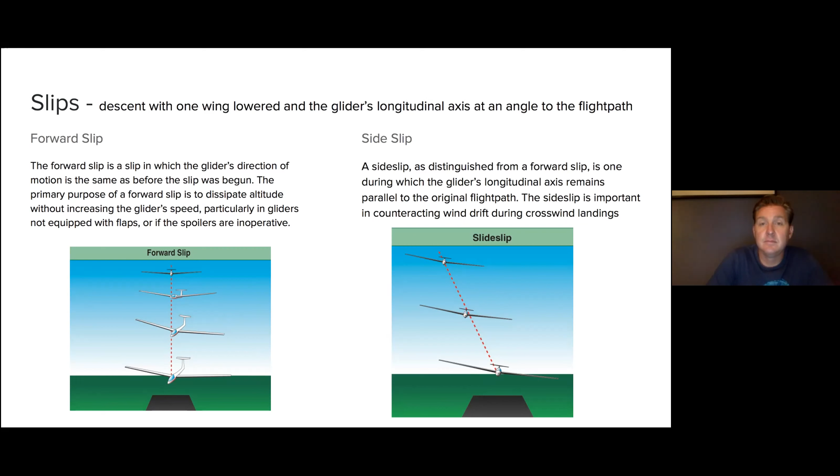Finally, ground effect. Ground effect, you'll find in the book, is an effect whereby there's a reduction in induced drag for the same amount of lift produced. Typically, when we're within about one wingspan above the ground, the decrease in induced drag allows the glider to fly at a lower airspeed. You could also think of that as a decrease in downwash and a reduction in wingtip vortices when we're within one glider width of the ground. This results in a lower angle of attack required to produce the same amount of lift.

One thing I'll caution about flying in ground effect: you need to be very mindful about using the air brakes. Typically, when we go into ground effect run like this, your air brakes or speed brakes would be stowed so that we're as efficient as possible. You can see this pilot is really stretching his glide by becoming super, super efficient.

However, at some point, you might need to land or pick your spot. When you deploy your air brakes, there's typically a pitch change associated with that. Being this close to the ground, it can lead to a very hard bounce or a balloon, both of which could be dangerous in this situation. So be mindful of that.

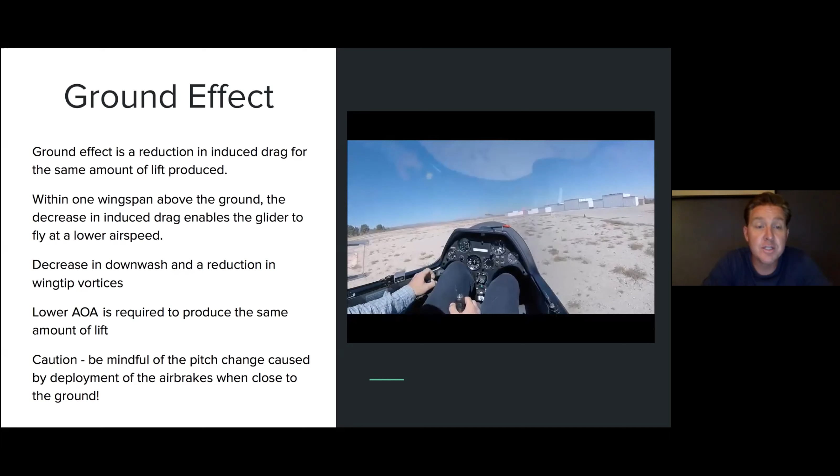Also, if you're out in Boulder, please be very careful at the end of the day to look both ways before crossing the active glider runway. A lot of times the private gliders end up flying all day, not coming home until 5, 6, or 7 o'clock at night in the summertime, and they'll typically land to the west because that's where they park. A lot of times we get a normal diurnal flow in the evening of a west wind in Boulder, so while people have been landing east all day long, the gliders may return to the west. A glider returning from the west can be very, very difficult to see, so be very cautious with that.

You'll kind of practice that ground effect return during a rope break. A lot of times you might be low, you'll be very, very efficient, and you might end up doing a slight tailwind landing in Boulder back to your parking spot. A lot of times you'll end up in this ground effect for some time.

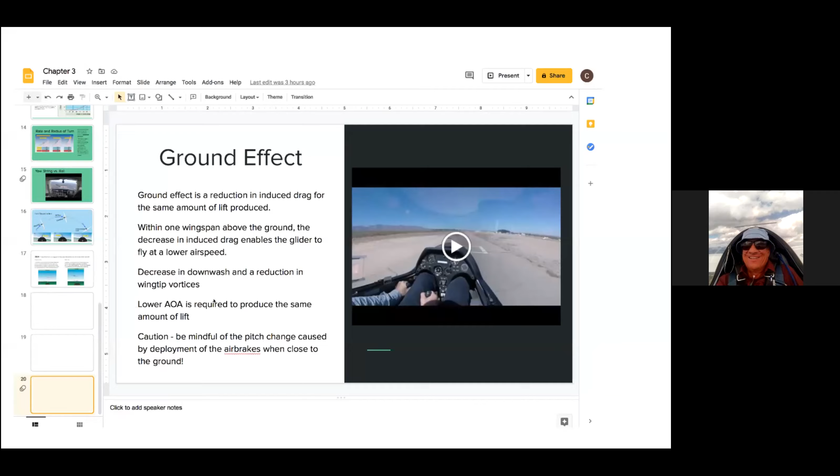Yeah, I remember. I was good when we were talking about the reduction in VNE at higher altitudes. It's not really important, but I've seen that, I've done it. It reminds me a lot of flying a jet, where when you transition from true airspeed to a Mach meter, your VNE comes down, and you even get up, if you want to get technical, to what they call a coffin corner. What I think is going on in gliders is just aerodynamic effects. You've got straight wings, and there are certain airspeeds where bad things start happening. So the only thing I'll add is to urge everybody, all the students, to honor those speeds.

Danny, you mentioned a term called coffin corner, and I think a lot of our students might not know what that term means. Jeff, who flew a lot of F-16, probably knows what coffin corner means. Jeff, you want to tell us what coffin corner is?